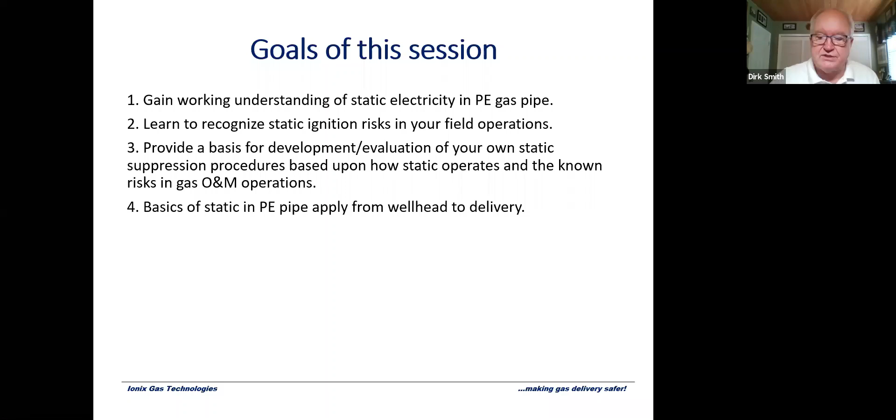I found that we can't assume we all understand the words and verbiage identically. So I want to make sure we understand what static electricity is. Often when I talk to people, they say static electricity is kind of an inferior kind of electricity - that the real serious electricity is what's coming out of the outlet here and powering this computer, and static electricity is inferior. That's not so. Electricity is electricity, energy is energy.

What makes the difference between static electricity and what we call current electricity - the electricity coming out of my wall to my computer - is that static electricity is electricity that has found itself sitting on a material that is not an electrical conductor, and therefore it can't move.

Let me explain. I'm in Boca Raton, Florida, and up the road in Juno Beach, Florida Power and Light has a generator. This generator starts ginning up a whole bunch of electrons by turning a generator. It takes those electrons and dumps them on a piece of copper wire. Because copper wire is an electrical conductor, those electrons, when placed on it, will start to flow along that wire and be delivered into my outlet.

It's the same thing when you take gas from transmission and put it in your pipe and pressurize it - it follows it and delivers it to the customer.

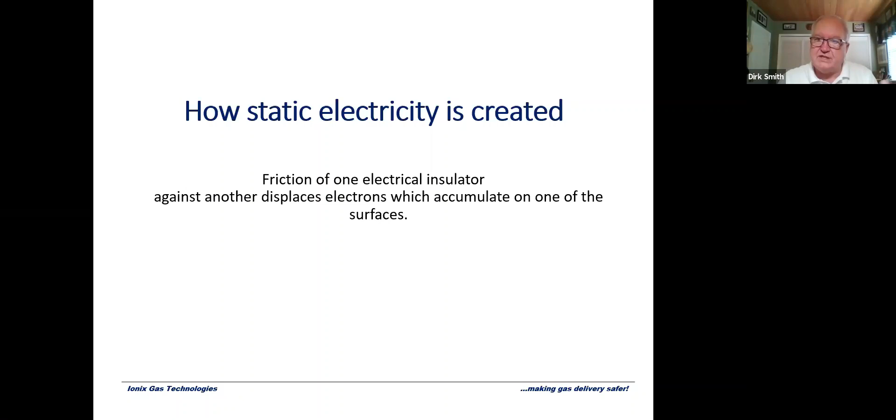These displaced electrons accumulate randomly on surfaces, but for reasons not known to us, they have a tendency to accumulate in certain areas. So it is the mechanical friction - methane being an electrical insulator and polyethylene being an electrical insulator - when those two rub against each other, the compression and force of that gas going past each other shears off electrons, and these electrons accumulate in random places inside your system.

Well, so what? That's great to know, but so what? Here's the problem: Mother Nature is designed not to like electrical imbalances. It's designed to be at electrical neutrality.

So what happens is, if your system has static in it, Mother Nature is going to neutralize itself. The key for you is to control when it does that, so that it doesn't cause an ignition, shock a worker, create a leak, or burn out some electronics.

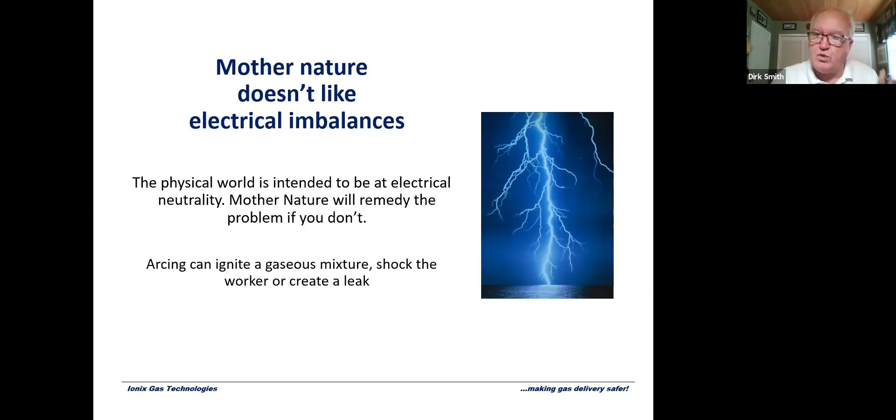So that's why you have to address it. Now that we know what static electricity is, we're going to apply it more closely to your particular situations, and that's the basics of static electricity in polyethylene pipe.

Down here in the States, a lot of distribution companies paid the Gas Research Institute, the precursor to the Gas Technology Institute, a lot of money to do research on static electricity and polyethylene pipe. I'm going to condense all these reports—I think research institutes get paid by the page—so I'm distilling and giving you the summary of a lot of research done on static electricity and polyethylene pipe.

This is the most important slide you're going to see today. If you don't remember anything else about what I say today, don't forget this. This is the root cause of any static ignition you have. At the very end of this, I'm going to talk to you about an incident where people were absolutely flummoxed at what happened because they didn't understand this.

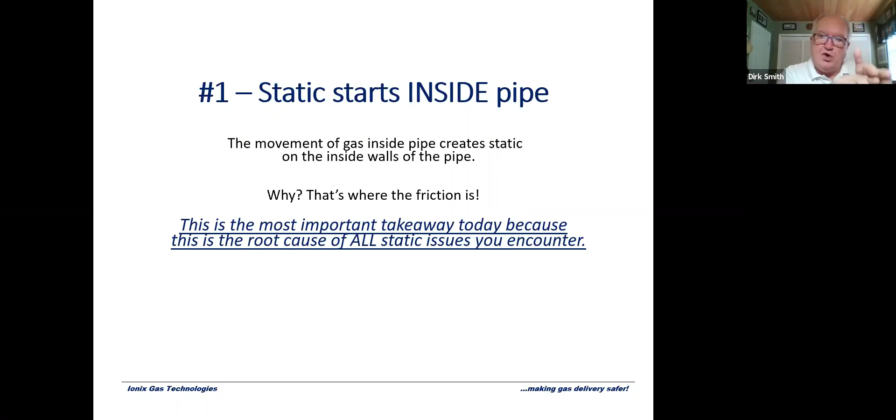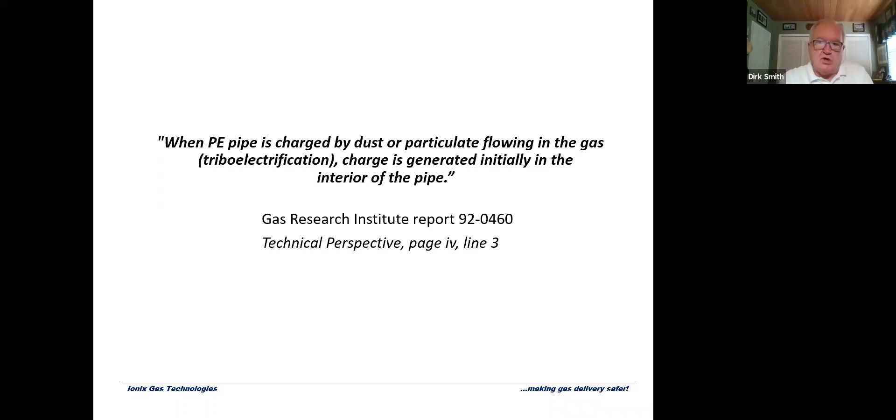All static starts on the inside of the pipe, because that's where the movement is, that's where the friction is. That's initially where the static charge develops. It's the passage of the electrical insulator methane inside a polyethylene insulator pipe that displaces electrons, and that friction displaces the electrons—they start to accumulate on the inside of the pipe. Here's your citation from Gas Research Institute: the pipe is charged by the gas, by particulates, and the gas flowing through the system, and the charge is generated initially on the inside of the pipe.

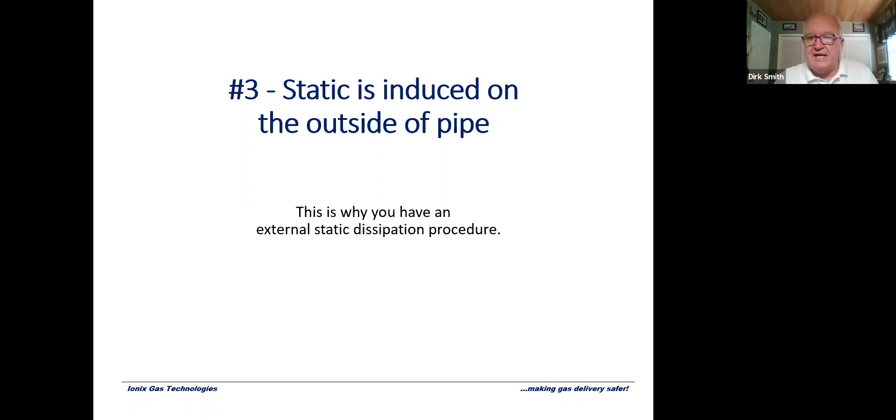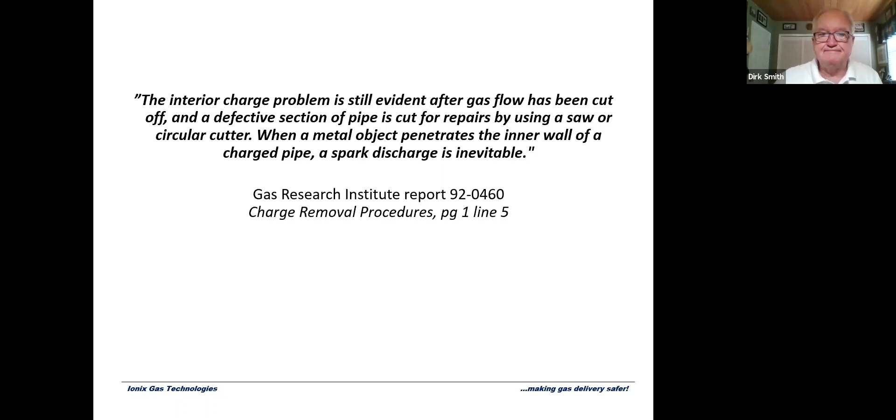Now, from these four basics, it creates four threats for you. We're going to go through all of them, but we're not going to spend equal time on all of them.

The first one, which is the most in-your-face, obvious threat, is the ignition threat, because that is a personal and property threat—that's where you have injuries, that's where you have property damage.

The second thing it causes is shocks, a lot of electrical shocks to workers—we'll talk about that a little bit. The third thing it does is create pinhole leaks in polyethylene pipe, so static is an integrity threat. And finally, as you put more sensitive electronics on pipelines, you're going to find that static is going to burn out some of these electronics.

But the key thing is, if you manage the static electricity in your system, all these problems go away. Those are the four threats. Now, we're going to talk primarily—most of this presentation is going to be about the ignition issue.

Like I said, we're going to talk about shocks and very briefly electrostatic pinholes and very briefly electronics.

But the first threat is ignitions of leaking gas. Now, if you think about it, you have a really unique problem when you distribute gas in polyethylene pipe. It creates its own ignition source. Just by forcing that gas through that polyethylene pipe, you're creating static electricity, which is the ignition source for natural gas.

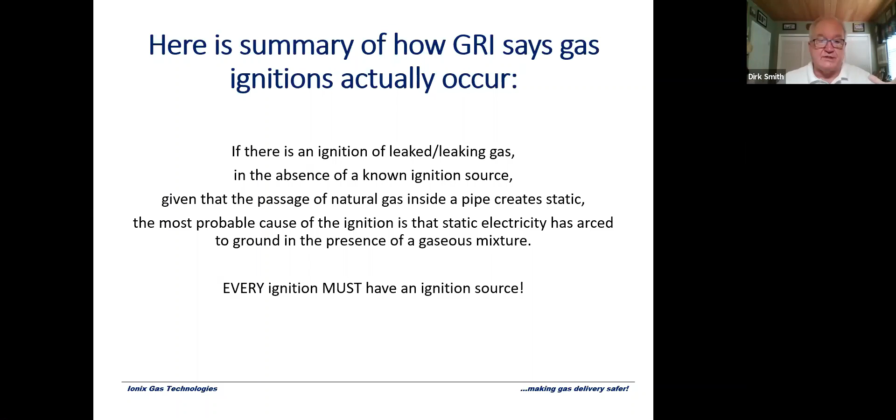Every ignition has to have an ignition source. So given what we know about the passage of gas in polyethylene pipe, if you've got leaking gas and you've got an ignition with no obviously known ignition source, then it must be static electricity. It has to be. So the most probable cause whenever you have an ignition without a known ignition source, like a sparking motor or a car running through a plume, is static electricity.

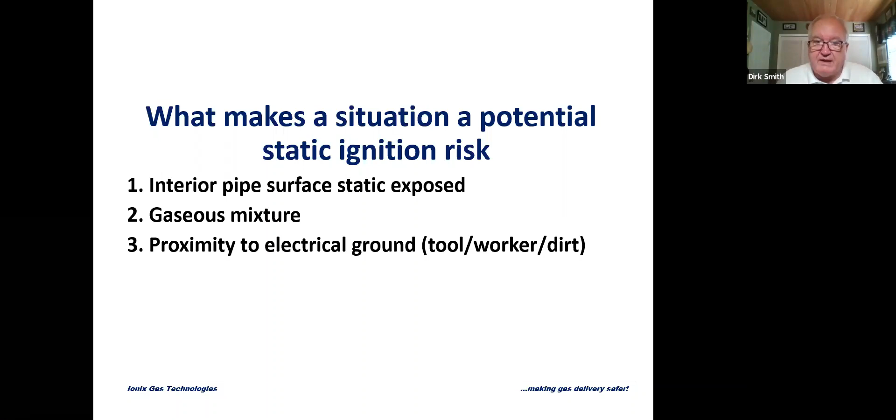So what makes a potential static ignition risk is that you have interior pipe surface exposed, which probably has a static charge on it, a gaseous mixture, and then proximity to electrical ground. That proximity may be a tool, it may be a worker, it just may be the presence of earth and ground.

Now, I'm going to show you this video. This is a very important video, and it's a very poor quality video. The reason why, it was videotaped by a friend of mine over television when it was broadcast over the air, so it was done well before any HD. But the reason this is important is this is the only instance I've ever seen where you have a static ignition captured on film. Let me give you the backstory.

It was in Oklahoma City. Very typical third-party damage. Somebody dug into a medium pressure line. Oklahoma Natural Gas sends a crew out into this housing development that's being built to repair the leak. Now the ONG guys are in the excavation, working to put a clamp on the broken pipe. Before they can put the clamp on, the gas ignites.

Now, the question is not what caused the damage. Obviously it's third-party damage. The question is what's the ignition source? Because you're not going to have these guys smoking cigarettes, they're not going to have sparking motors, so what's the ignition source? The only thing it can be is static electricity. And so this shows you how GRI is right, that static electricity generated inside the pipe due to the flow of gas is the cause for a static ignition.

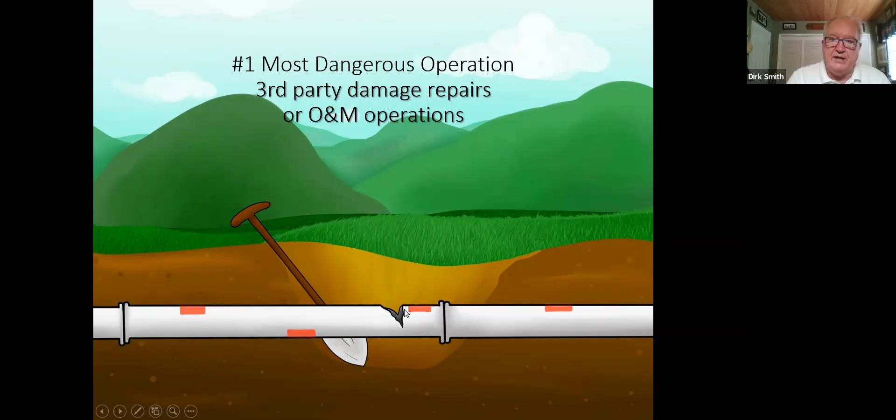Now, if you have an O&M operation, you're probably not cutting into anything that's blowing gas. However, there could very well be a static charge on the inside edge of that pipe when you begin your operation after you've done the squeeze off and taken it out of service. So whenever you're cutting into a pipe, or a pipe's been cut into, you have to be careful and understand there may be an underlying charge inside that pipe, assuming you've dissipated the charge on the outside, and this charge is going to build up inside and under those broken or cut edges.

So whenever you have a purging operation, you have to be aware that there's a lot of static on the inside edges where that pipe is exiting gas. And in the same way, assuming you use a metal grounded purge pipe, the connection between your plastic and your metal is never going to be perfect. There's always going to be some turbulence in the gas passing through it there. So once you separate your pipe, you need to be aware that there's static on the inside edges of that plastic pipe.

Now, with all the interest in overpressure vents and relief valves due to overpressure incidents, any kind of valve or device that's going to engage during a relief or overpressure operation, the same thing occurs: if it's vented outside, the static on the inside of that pipe can build up and arc and create an ignition.

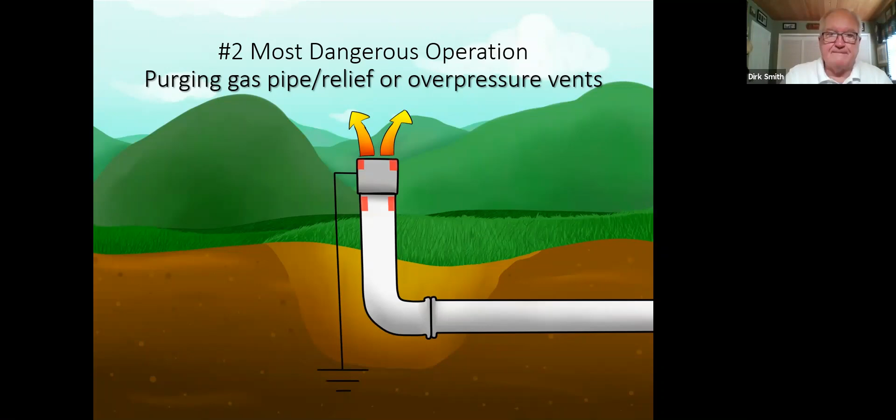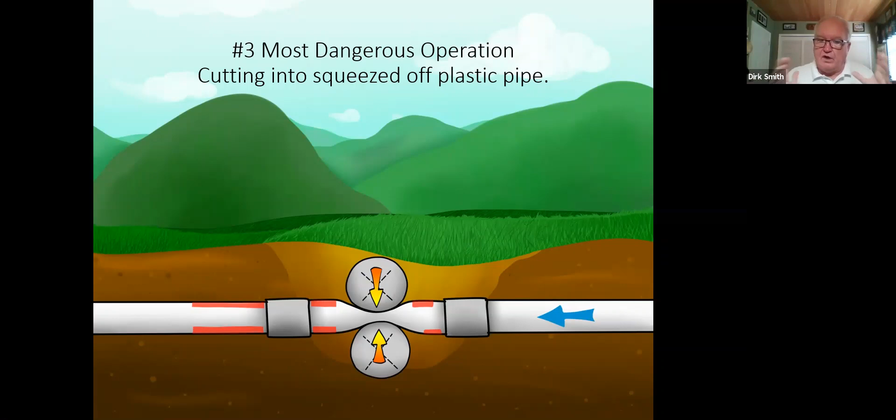The third most dangerous operation is cutting into squeezed-off plastic pipe. When you squeeze off a plastic pipe, the Venturi effect takes place and the gas speeds up trying to get through the narrow opening. As it does, it creates tremendous downstream interior voltage, and also substantial interior voltage upstream from the squeeze-off, though primarily most of it is downstream. So when you've squeezed off a piece of pipe and stopped gas flow, you have to exercise extreme caution when cutting into it because of the substantial voltages that could be downstream and upstream of the squeeze-off.

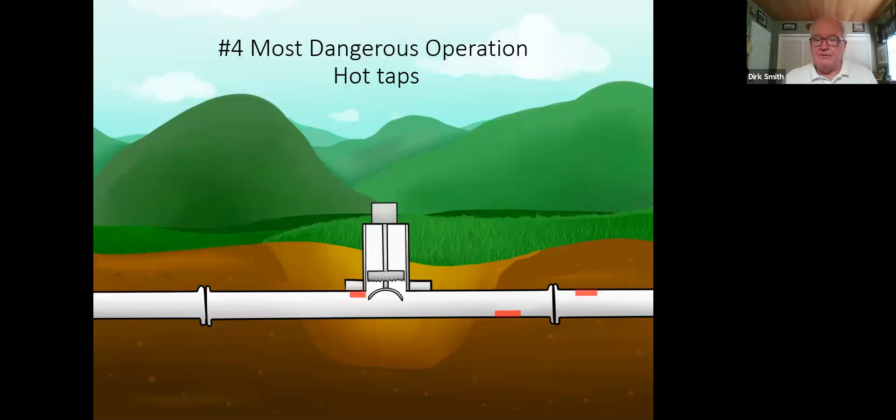The fourth most dangerous thing is a hot tap. Here you have a fixture that's been fused on, and as the tap came down, it cut into a hot spot in that pipe. Whenever you have a tap, you've got to be concerned about the static on the inside of that, and you want to dissipate the static at the point where the tool is cutting into the pipe. Whenever you're cutting into a pipe, you might cut into a hot spot, and even though it's under pressure with residual gas, the tool can ground it or arc to ground, and then you can have an ignition. That's happened whether it's been opened up, reached into, or cut into.

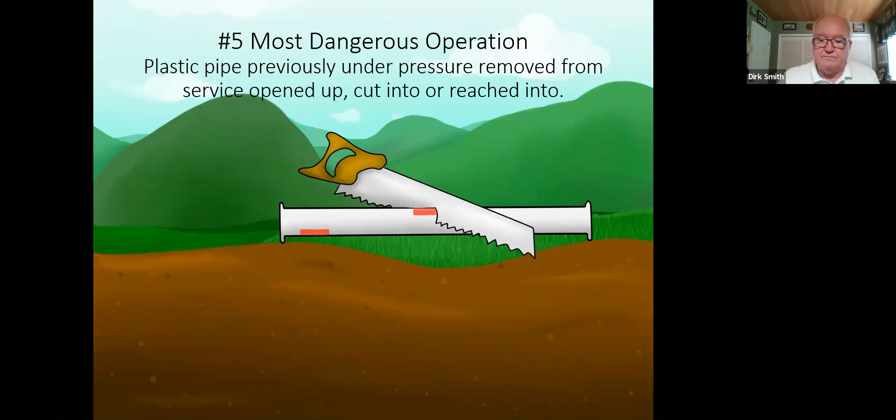Now I'm going to take a little sidestep here. Most people think static is only a polyethylene plastic pipe problem. Not so—it's also a metal pipe problem. Metal pipe, by nature, since it's an electrical conductor, does not have the same potential to have as many static ignition issues, but that doesn't mean it can't have them.

Bare pipe is going away—you're replacing it all, it's all coated. Or you have old metal pipe; some guys in the Northeast US have old cast iron stuff, and oh my gosh, they don't want to know what's inside those pipes. What happens is if you have coatings or residual chemicals, tars, grease, or scale, those patches in a metal pipe are electrically isolated, and static can build up on that. If you happen to expose that to ground, it can ignite a gaseous mixture. So you have to be aware that just because it's metal, that does not mean static can't be present inside that pipe.

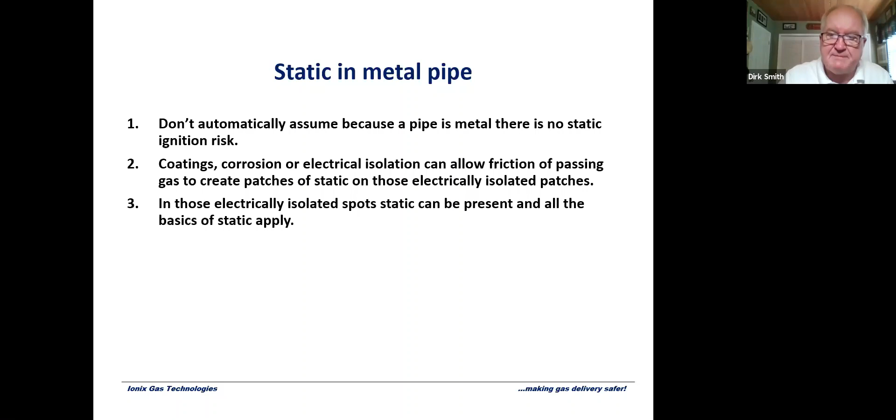What's the ignition source? Everything has to have an ignition source. There's nobody out there—it was in the middle of the night. What's the ignition source? The pipe failed, gas is escaping, and at a place on that pipe, probably where there's coating, the static charges start to build up and up as that gas is exiting at high velocity. The charge finally gets so high it arcs to ground and ignites a gaseous mixture.

So be cautious—just because it's metal pipe does not mean there's no static present. Now, we've talked about the first threat, about where the static is in a lot of these operations, so you can be aware of them. Now we're going to talk about electrostatic shocks to workers.

This is much more common. When I talk about ignitions, there have been fatalities due to burns—that happens, though it's not common. An electrostatic shock to workers—there are a lot of cases of these.

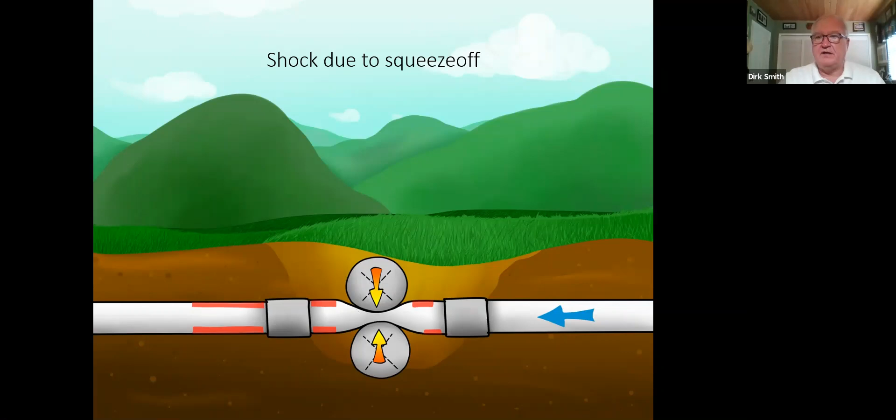Once again, we're going to go back to squeeze off, because this is where you're going to find some of the highest voltages generated inside a pipe, due to squeeze off operations. We'll talk about grounding tools in just a second, but forgetting the tool right now, these static charges that build up inside this pipe, both in the front and in the back, if somebody gets close enough to it, it will arc from that pipe like it did that guy and go to ground through the worker. So you have to be very careful dealing with squeeze off and the shocks it can create for workers. The second thing is when you cut into hot spots in pipe.

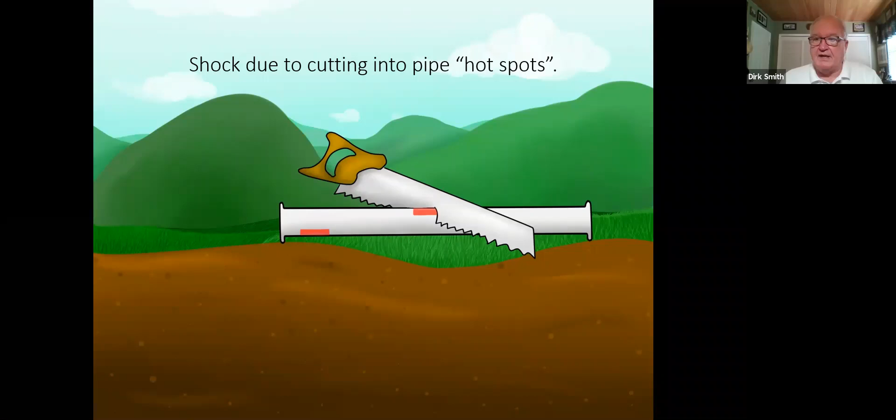I had an incident in the Midwest or Western United States. A distributor had an 8-inch line with a 6-inch stub line off it. The area was growing, so they wanted to extend the 6-inch stub line. They took the 8-inch line out of service. Then the guys got into the excavation to cut through the stub to extend the line. Next thing, boom, explosion. Not a fire, just a shock. Two guys went off to the emergency room. The gas distributor was embarrassed because he hadn't called for a locate, so he calls the electric company and says, sorry, we didn't call for a locate, we just cut one of your lines. The electric company says, we don't have any lines out there. What had happened is they'd cut into a hot spot and the tool grounded it and shocked the workers.

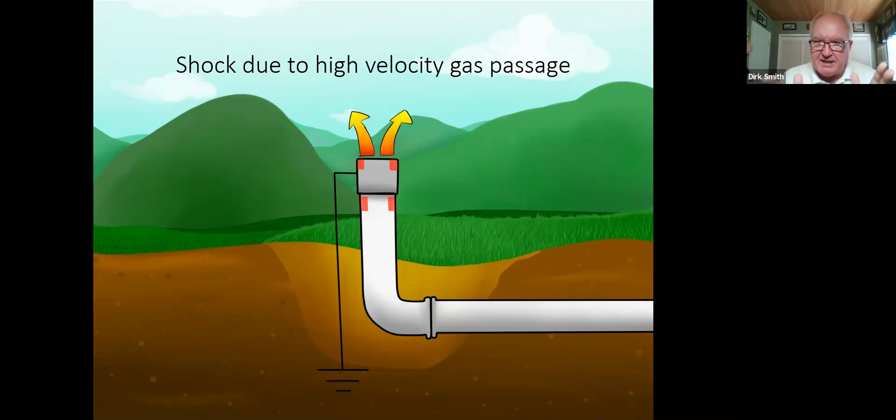The same shock can happen again when you have high velocity gas passage, whether it's a purge line like that, or any kind of blowing line. You need to be sure to understand that that could be a shock hazard from the charges developed inside that pipe.

Now what we're going to do is talk about developing and evaluating best practices and operating procedures for static ignitions and static shocks. In a few minutes we're going to talk about electrostatic pinholing and electronics burnout. There are no procedures to prevent that, and I'll explain why. So basically, what I'm going to do now is start to talk about how you can look at these operations we've just covered and have procedures that address preventing ignitions and preventing shocks.

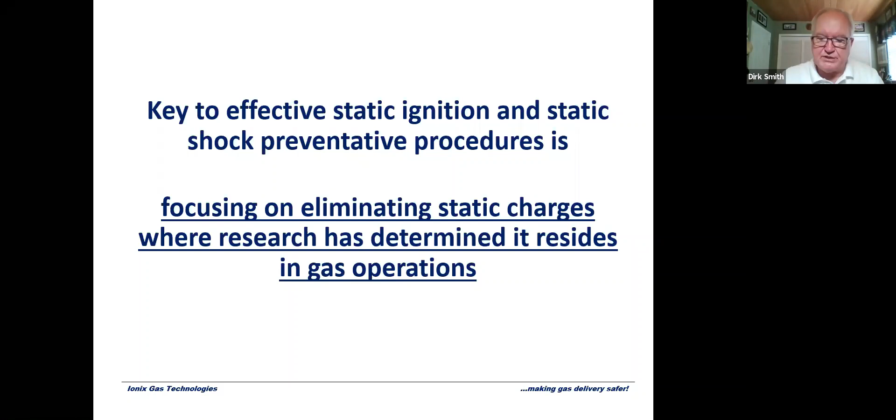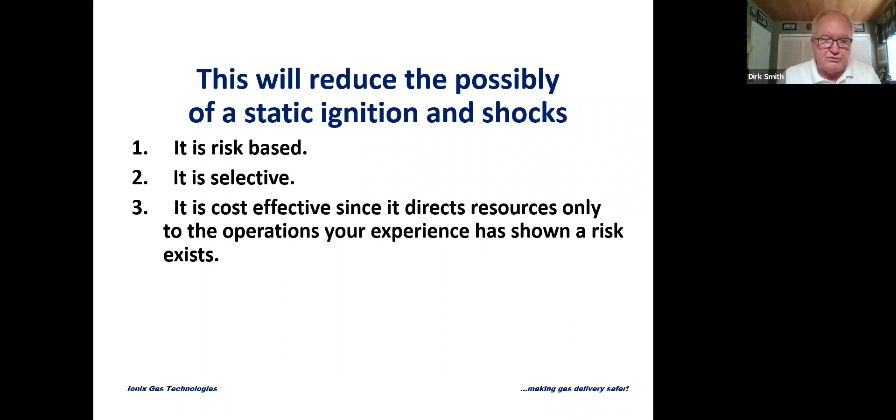The key thing is, now that you have an understanding of what static is, the basics of static in polyethylene pipe, and where they occur in these operations, once you focus your procedures to eliminate the charge where research has determined it exists in these operations, you're going to be able to prevent shocks and ignitions, and that's our goal. When you do that, you've identified where the risk is, you're selective in your efforts, and it's cost effective because you're not just doing a shotgun approach, spraying everything or grounding everything. You're saying, I know where the static is in these operations, and I'm going to make sure my procedures take care of the ignition and shock risk in these operations.

Now when we talk about an ignition threat, we're going to start to talk about how to evaluate your static risk reduction SOPs. The first thing you have to do is get management buy-in. Right now there are 58 people on this webinar, and you clearly understand this problem. But just because you're here doesn't mean your management has the same interest in preventing static ignitions and shocks as you do. You must get management buy-in.

Alagasco, which is now Spire here in the States, their safety manager Tom Rayburn, who's since retired about 3 years ago, went through all the claims at Alagasco. He said, Dirk, when I went through all the claims, I found that static ignitions were one of the rare ones, but they were one of the most expensive. And when you think about it, burns are terrible. They are really, really terrible.

We had an incident out in West Texas, a standard O&M operation. They had an ignition, and this young kid—how he didn't die, I don't know—wound up in a burn intensive care unit for 2 months, with 2 nurses around the clock for 2 months. And that doesn't include the step down and rehabilitation, everything like that.

Burns are terrible. So there has to be management buy-in that prevention is cheaper than remediation. That's got to be the first thing on the list to do.

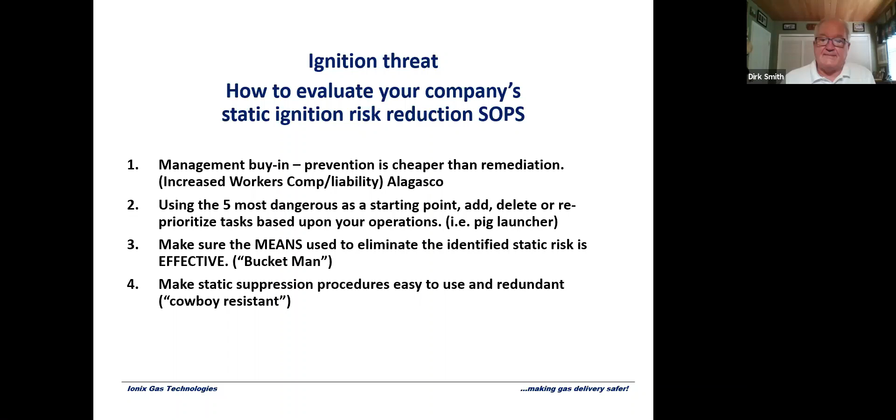I'm going to give you two simple things you can do as soon as you leave this webinar that will make a difference. The first is to dissipate static from a safe distance whenever possible - use remote static dissipation procedures. The purpose of these procedures is so ignition doesn't occur with a worker in proximity. A lot of times using rags requires putting the worker close to a possible ignition to apply the static suppression procedure. That makes no sense. So try to dissipate static from a safe distance.

The second thing is be ruthless in your enforcement of the procedures you develop. Be consistent and comprehensive.

About four years ago in the Mid-South, a crew of five from a municipality went out to do a standard O&M operation in a street excavation. I know the operator, I'm not privy to the details, but there are certain things you can take from it just from the basic facts. Witnesses said they heard a whoosh and then screams as a two-inch gas line was blowing and on fire in an excavation. There were three guys in the excavation and two outside. All five went to the hospital. Of the three in the excavation, all were critically burned - two survived, one died thirty days later from his burns. My purpose is not to point fingers or assign responsibility. We don't know if the worker didn't follow procedure or if the company didn't have one. But clearly, when you have a blowing two-inch gas line in an excavation with three guys and no fire suit, it is a major failure of procedure. If you are not ruthless in enforcing your procedures, you can have a catastrophic event.

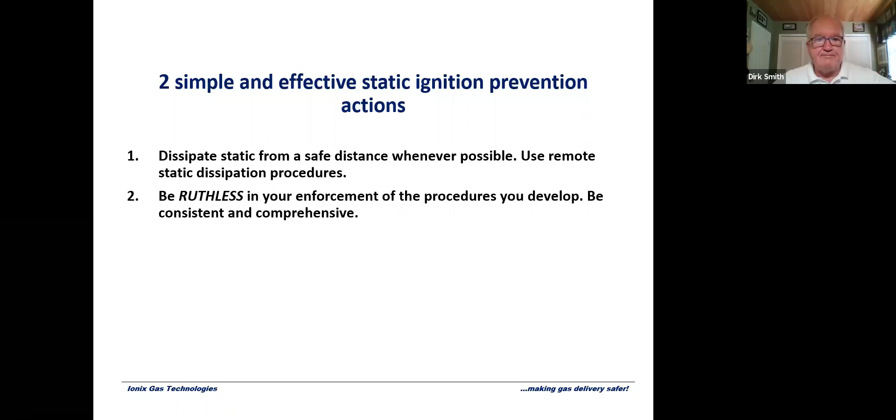The best way to prevent that is to be ruthless in the enforcement of the procedures you develop or already have, and be consistent and comprehensive. I know one operator that if they catch a guy not following a static suppression procedure, he's fired. That's it, no explanation, no recourse, no warning. That's it, because it can be that serious. So be ruthless when you set up your procedures.

Now, we've been talking about static ignition, and the static shock threat is very similar to this. The first obvious thing you can do is keep safe distances from known high voltages until you've at least externally dissipated the pipe they could come in contact with, keeping in mind there could be a substantial interior charge.

Now, a lot of times there's grounding procedures, people have grounding of tools. It's important to understand what grounding of tools does and doesn't do. Grounding of tools is only a worker protection procedure. It does not do anything to get rid of the static. You say, well, yeah it does, if static charge goes through the tool the guy doesn't get hurt. Okay, well, that's true.

But remember, that tool—because polyethylene is not an electrical conductor, it's an electrical insulator—only grounds a charge at the point it touches. So imagine you've got a squeeze-off tool and it's squeezed off a section of polyethylene pipe and you've got that grounded. All that does is take the charge where that metal came in contact with that plastic and conduct it to ground, preventing that charge from going through the worker to ground instead.

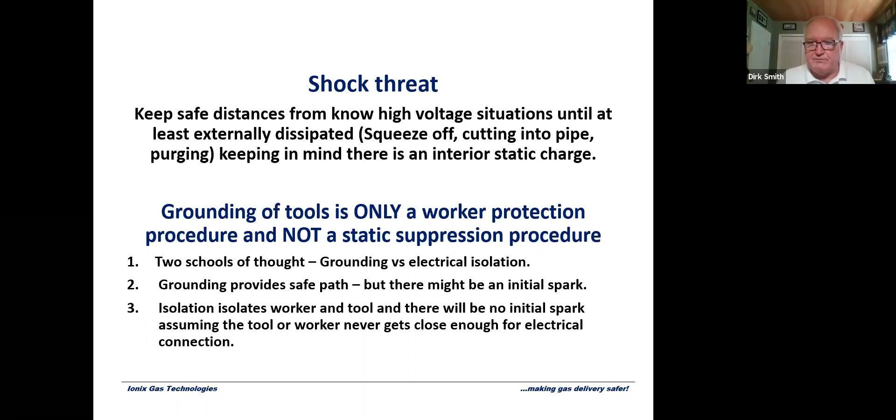There are two schools on that. I'm not here to advocate either one. All I want you to understand is grounding of tools is not a static suppression procedure. It's a worker protection procedure, and that's important to remember.

Now, we've talked about the two primary threats that I think most of you are interested in. I'm going to talk about two more very briefly, just so you recognize them, because static creates leaks in polyethylene pipe. I want to explain this because I've seen operators fight this problem for years, thinking they've got bad pipe, when the problem is actually static. I just want you to be able to recognize it for what it is.

This is a paper that was presented to the Plastic Pipe Symposium about 1985, written by Mark Staker. It was the first paper ever written about static electricity in polyethylene pipe, and it was not about ignition. It was about the fact that when he was doing squeeze-off, he noticed he started getting pinhole leaks around his squeeze-off, and he wrote a paper about it.

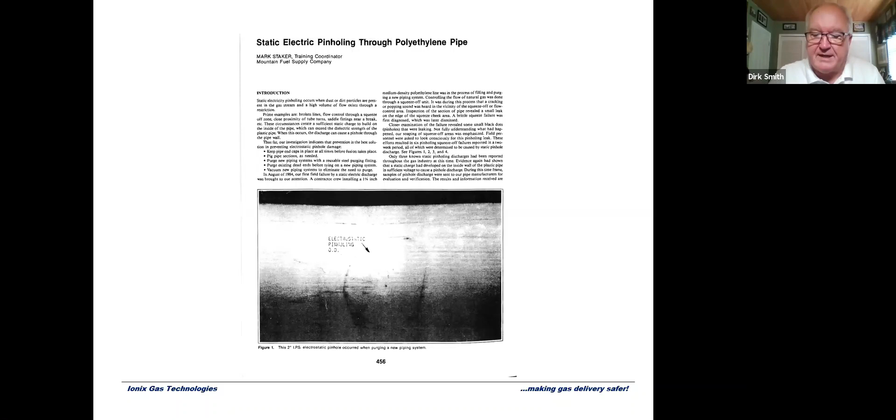Essentially, what happens is this: if you go back to the basics I've talked to you about, static originates on the inside of the pipe.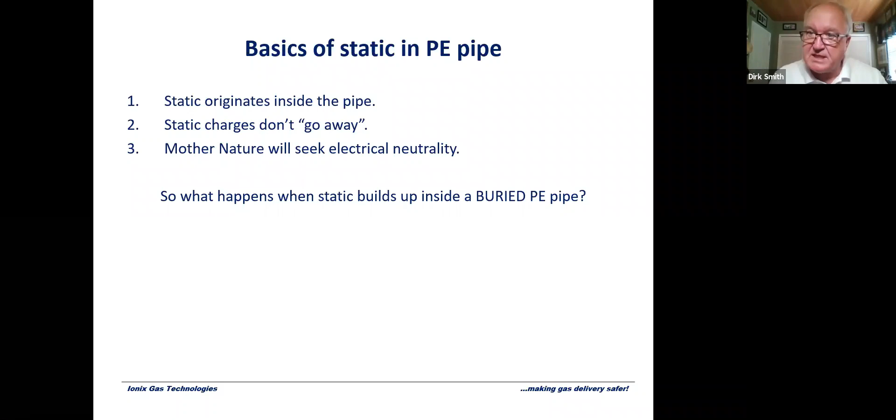It can't go away. Mother Nature wants to go to electrical ground. We've been talking about instances where that pipe's exposed, where you've dug it up to do an O&M operation to repair third-party damage or something like that. What happens, however, if that pipe is buried, not exposed, and those charges build up inside that pipe? This is what happens.

This is a cross-sectional of an electrostatic pinhole in a standard yellow pipe. What happens is the static builds up on the inside of the pipe due to the friction of passing a gas. Remember, Mother Nature wants to go to electrical neutrality. So that charge then, even though polyethylene is an electrical insulator, it's not an infinite electrical insulator.

Just like your polyethylene pipe will hold pressure, it won't hold an infinite amount of pressure. There's a limit. Electrically, it's the same way. There's a limit to how much voltage that pipe can stand before it fails. And what happens is that charge builds up on the inside, it arcs through the pipe to ground itself, and in the process, the heat of the arcing burns a hole in the pipe and creates a pinhole leak.

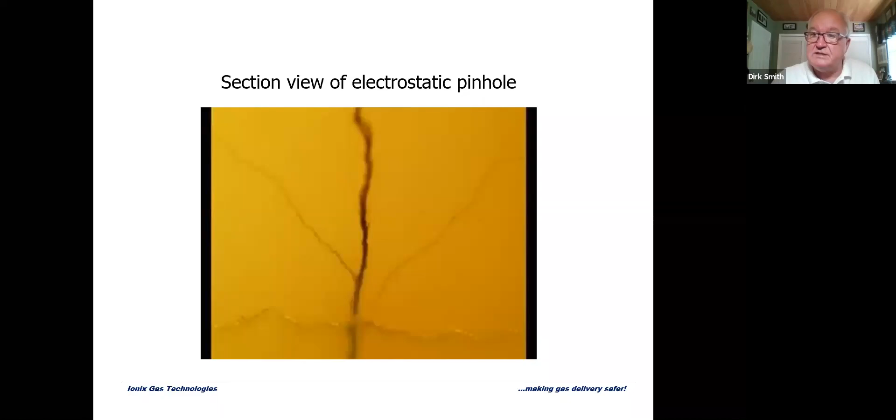Gas research has confirmed this. The charge conditions get so high across a pipe wall that they exceed the strength of the material, and they arc through it and create a pinhole leak.

Now, in the United States, and I know up in Canada it was, I think maybe you probably passed it sooner, but in the US they put a no-regrind rule in, that they can't put regrind in polyethylene pipe. And the reason is, in the United States, the PHMSA specifically cited in the Federal Register when they made this rule that we believe regrind is contributing to pinholes.

They don't, down here in the States, PHMSA does not want pinholes in polyethylene pipe. But it's important to remember that all pipe, doesn't matter whether it has regrind or no regrind, all pipe will fail if the voltage gets high enough.

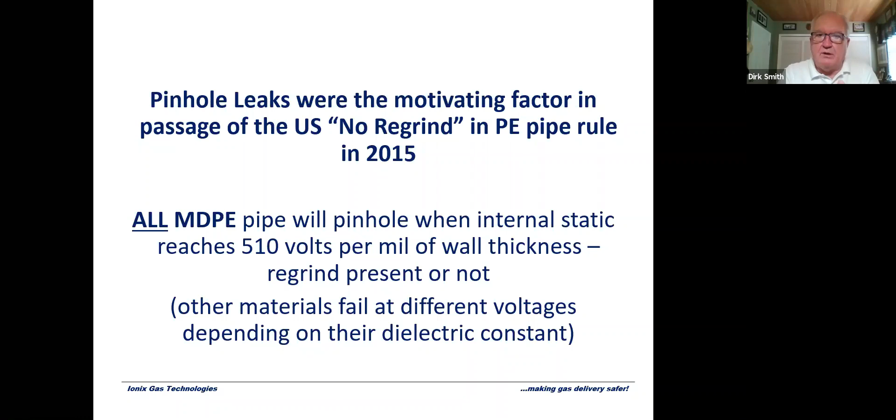If you take virgin MDPE pipe, there's an engineering constant. What will happen is that pipe will fail if this voltage inside exceeds 510 volts, approximately, per 1,000th inch of wall thickness. Other materials will fail at different rates. But remember that the problem is static, it's not the material.

So all I want you to do is to remember that pinholes are created in the normal operation of gas transport. It is not a materials failure.

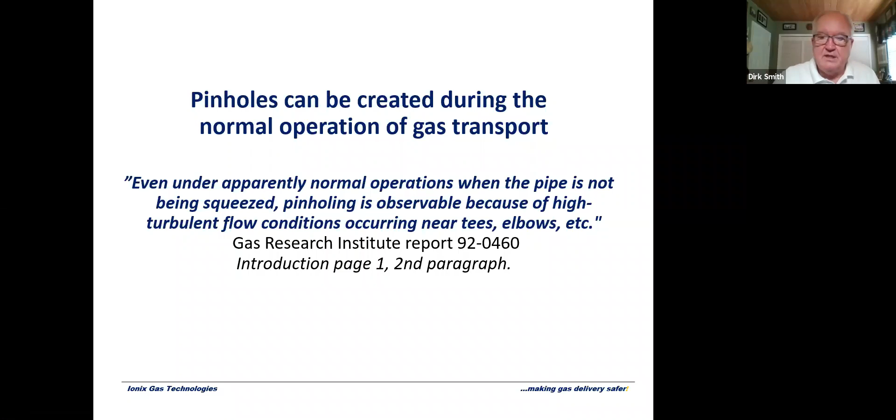I have a webinar that deals strictly with this problem because this is a problem both at gas producers in the Permian Basin to delivery point. But all I want you to do is recognize that it's not due to manufacturing defects, it's static.

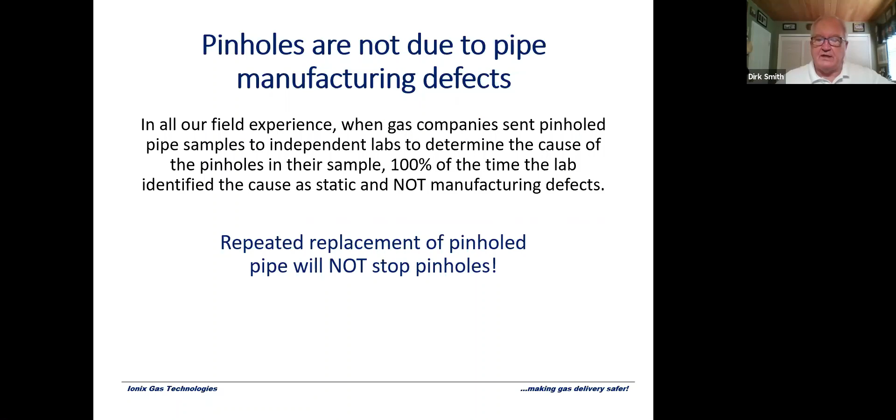All the lab tests and failure analysis have said it is not a materials failure, and replacing a pipe is not going to solve the problem. You got to get rid of the static.

Here is the last thing on this issue of electrostatic pinholes. Down in the States, there's a newsletter circulated with fire investigators, forensic fire investigators, called the Fire Findings Newsletter. They sent this to me because they were getting fires at gas meters and they could not figure out what the source of the leak in the gas was.

They said, could it be pinhole leaks in service lines that accumulate and ignite? Sure can. I had a gas well catch on fire in the Permian Basin because the gas line coming off the phase separator pinholed and ignited the gas and burned away the pipe. Yes, it can. So you need to deal with the problem, and it's not replacing the pipe. That will not solve the problem.

Very quickly, if you have pinhole leaks, they usually occur in 1 inch or smaller plastic service lines because the smaller the pipe, the thinner the wall, therefore the less voltage needed to put a hole in it. I've seen pipe with 1, 2, 3, 4, 5 holes in it. I've only seen it in polyethylene pipe, no PVC. I've seen it in medium density. I've seen it in high density polyethylene. I've seen it in every brand of pipe.

And if you have pinholes in your system somewhere, they have a tendency to congregate geographically. In other words, if you're finding some service lines in a neighborhood that's got pinholes in it, you probably have them in the whole neighborhood. There's a problem in southern Indiana, northwest Kentucky, southern Illinois, Fredericksburg Virginia, New Haven Connecticut. For some reason, we don't know why, they have a tendency to congregate in geographical areas, and they're going to continue to be made unless you address the static problem.

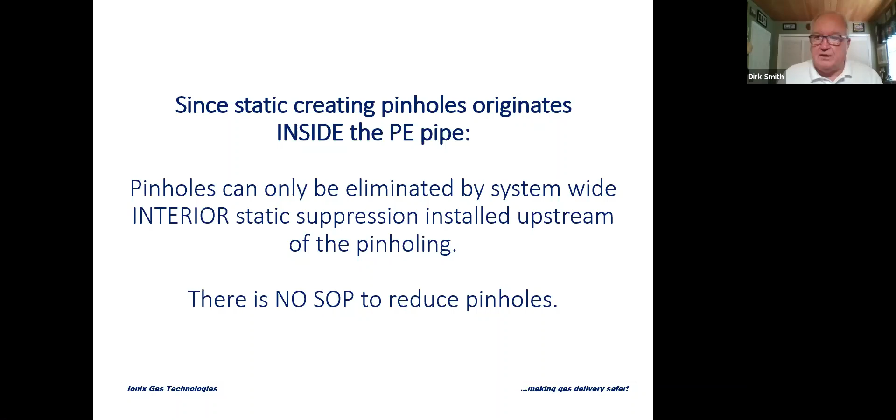If you just keep replacing the pinhole pipe, it may be cheaper to put static suppression in so you don't have to constantly be digging up stuff. Very last thing, there's only one slide on this, then we're going to review standard mitigation technologies and do a big summary, and we're done.

We're going to find more and more that static in polyethylene pipe is going to burn out electronics. Remember we talked about how static builds up in that pipe. Let's say that pipe is coming up out of the ground. It has an electrical isolation joint, and you've got a solid state meter up there. Now you can have 40, 50,000 volts inside that service line.

If that voltage arcs across that isolation fitting, it can go through that meter and burn it out. All solid state electronics is designed for 2, 3, 4, 5 volts, and these service lines at the pinhole are at voltages of 45, 50, 60,000 volts. So when you start to see areas where electronics are burning out, everybody assumes it's lightning. It may be lightning, but it may be lightning inside the pipe. Again, there's no standard operating procedure that's going to prevent this because it's an interior pipe problem.

I was out in Kansas, and what had happened is they were doing a repair operation. They put on the locate transmitter, connected the tracer wire, traced the pipe, dug it up, and squeezed off the pipe. Next thing you know, 3,000 feet downstream, the locating transmitter burns up.

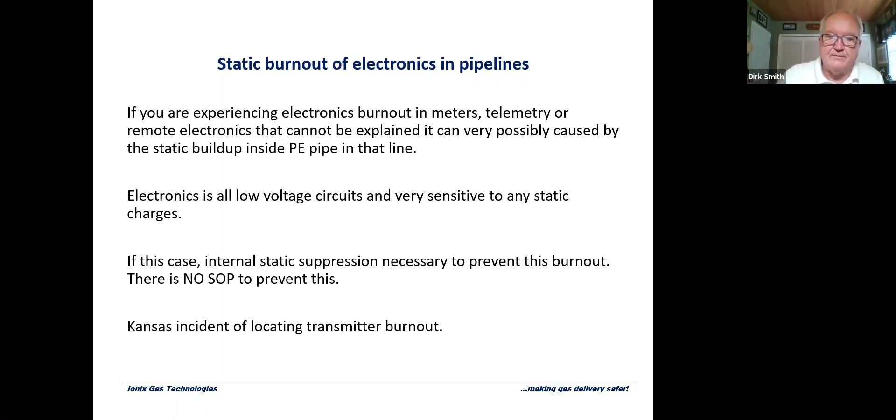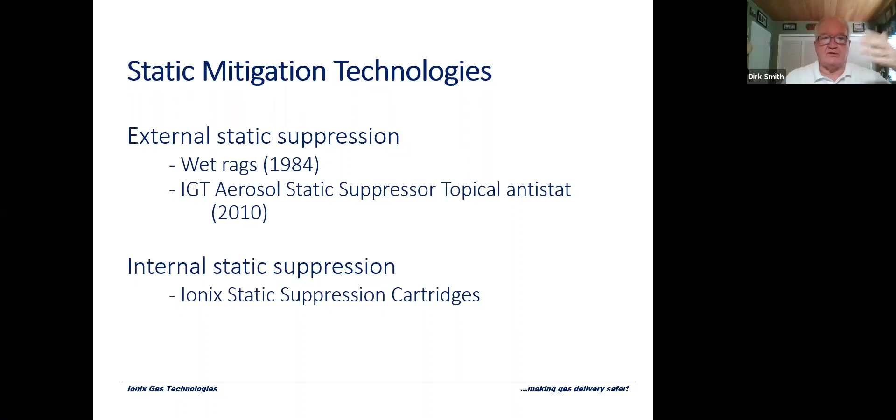Real quickly, we're going to finish up here. Static mitigation technologies — what I'm doing is basically separating them based on what surface they address: static on the exterior of the pipe and static on the interior of the pipe. So we're going to look quickly at the technologies available to get rid of static on the outside of the pipe, and then quickly on the inside.

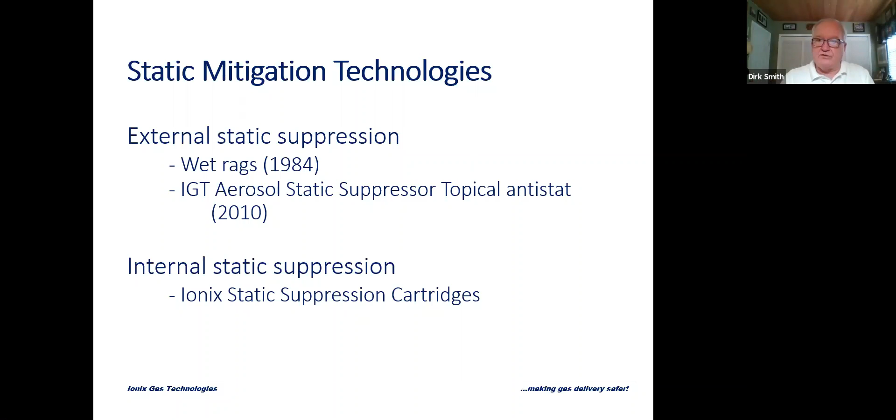On external static suppression, you have wet rags. They were recommended by the AGA back in the 1980s when polyethylene plastic pipes started to be introduced, because they had nothing else. What we did is we took antistat technology developed for semiconductors and computers, modified it for the particular needs of the natural gas industry, and made our aerosol static suppressor. It's a topical antistat. Then for interior use, we have Ionix static suppression cartridges. Now I want to talk to you about the advantages and disadvantages of these technologies.

First of all, using grounding and wet rags — that's essentially all that happens. Wet rags simply ground whatever surface they're connected to. This is a picture of Normac's ASG system. They've since discontinued it and recommend our product as a replacement, but I wanted to show it because it's a cleaned-up version of wet rags or soapy burlap. Essentially, you see that pink film — they wrap it around a surface, spray it with their solution, and ground it with that rod, which carries the charge off to the ground. That's basically what wet rags do: you wet them up, they become electrical conductors, and you make sure the rag is connected to ground.

Now, it's a cheap technology, it's an old technology, but there's a couple problems with it. First of all, it really doesn't solve the problem of why you're doing static suppression. You want to get rid of a static charge so it doesn't ignite in the proximity of a worker. Yet to use wet rags, you've got to go down where there's a potential ignition and wrap those rags around that surface and ground it to get rid of the charge. Well, you really want to get rid of the charge before the guy goes into the excavation, not make him go into the excavation to get rid of the charge.

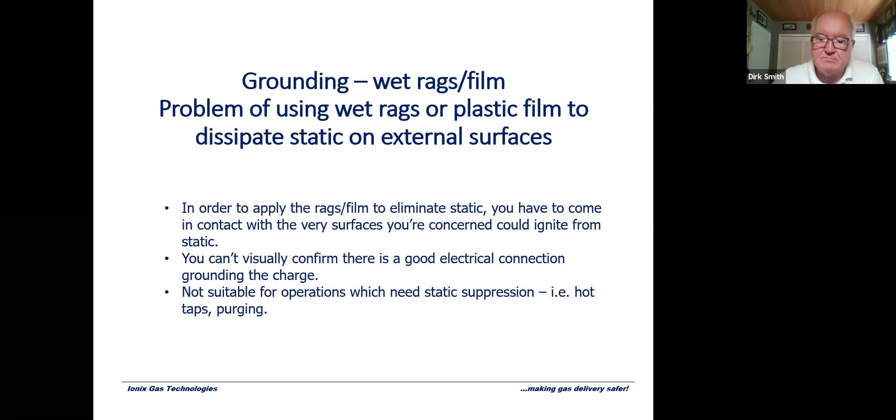Our external topical antistat, the IGT aerosol static suppressor, works on an entirely different theory, entirely different. We don't ground it. What happens is on a chemical, molecular basis, when our liquid hits a surface, it immediately dissipates the static charge. It does it on contact without grounding, immediately. So the nice thing about it is you can get rid of a charge anywhere you can get a surface wet with our aerosol.

Like with hot taps, you simply spray inside the tap. If you've got a purge pipe, when you're finished purging, you just take the reach tool and stand up there and spray inside the pipe. Or if you've got third-party damage, you've done your squeeze off, you don't want anybody in that excavation. You take the reach tool and spray from the outside and get it all nice and wet. You're done.

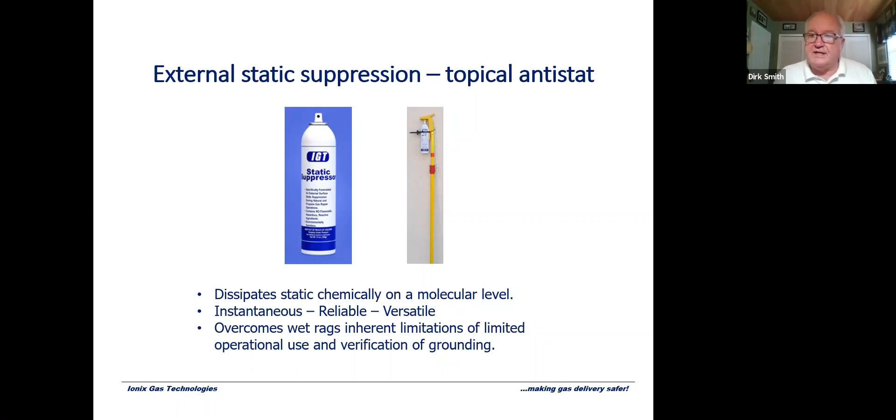We had our aerosol tested by the Gas Technology Institute for this reason. Guys, people are creatures of habit. Your workers out there say, yeah, I've used soapy rags for a long time. How do I know this really works? And we wanted to make sure it was as effective, that there's no legacy issues.

If you spray on polyethylene, is it going to cause a legacy issue or anything like that? GTI tested it, and they said it doesn't affect the PE. It's as effective as wet burlap in eliminating static, and it's non-flammable. So that's why we had them test that.

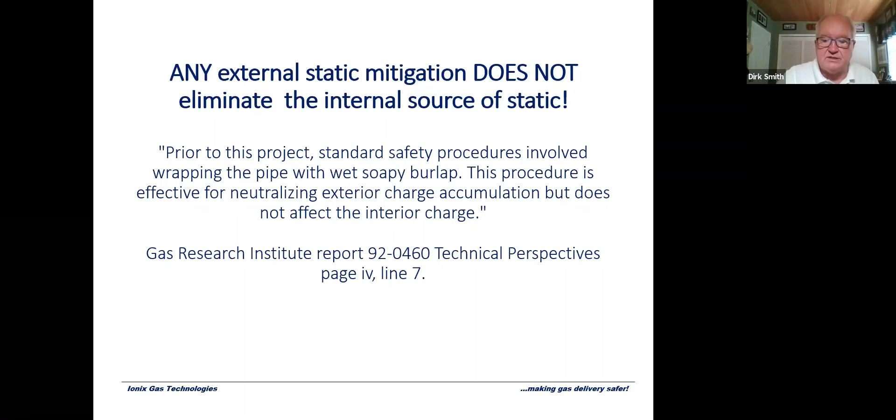Now, it's important to remember when you put all your procedures together, external static mitigation does nothing to get rid of the internal static charge. Here's the citation from Gas Research Institute. It's vitally important you remember that. Static is generated initially on the inside of the pipe. It creates a charge on the outside of the pipe. If you get rid of the charge on the outside of the pipe, you've done nothing to get rid of the charge on the inside of the pipe. You must respect that charge.

Now, we have an internal static suppression cartridge system, and it's not a liquid. It works entirely differently than our spray, but it's designed to eliminate the creation of static inside the pipe, which it does. Most of our customers using this are doing it because they want to get rid of pinholes. They're having pinhole problems, and when they get rid of the internal static, the pinholes go away, and it saves them a lot of repair costs. So that is designed to eliminate static inside the pipe.

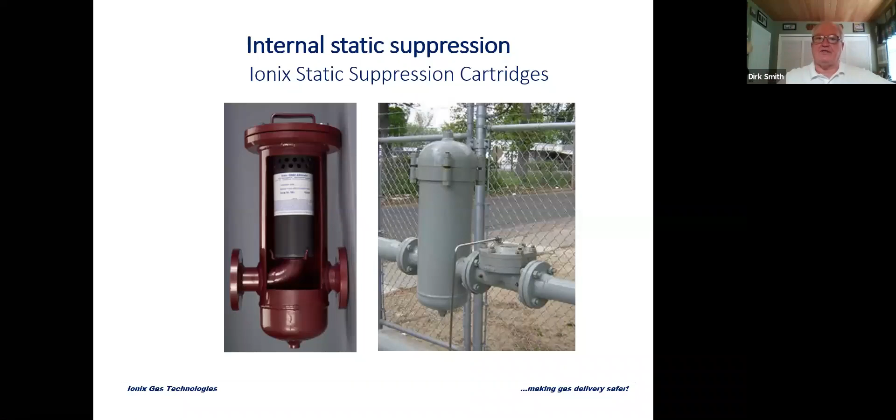So that kind of gives you an outline of the technologies for external static suppression, both grounding and topical antistat, and then internal static suppression with our cartridge. We also had it tested by NICOR and labs, and we were able to make static come and go in systems in a neighborhood, just by bypassing it in and out. We can make static come and go at will with our static suppression system installed in the system.

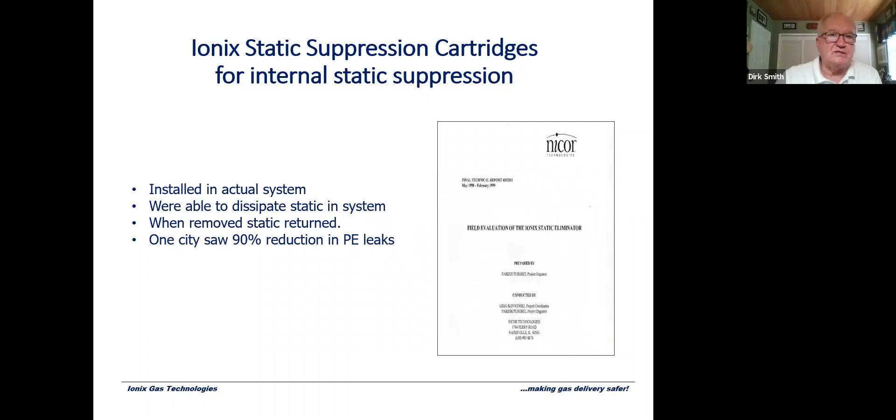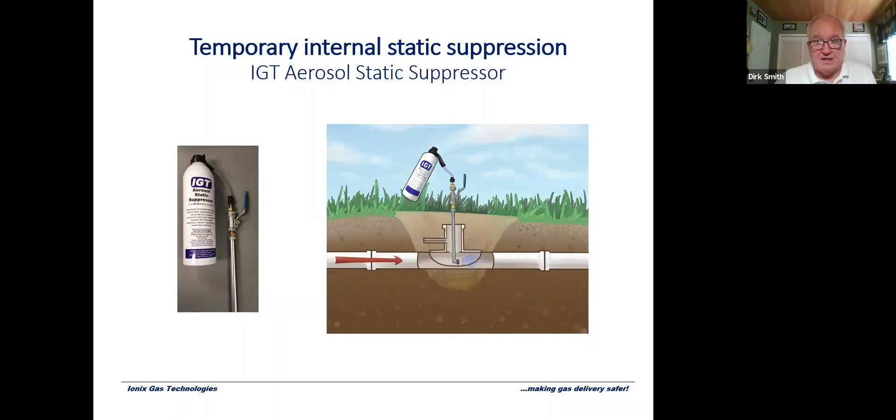And then finally, we have a tool that if you want to get rid of temporary and internal static suppression, we have a tool using a fixture from Fisher Plastics that allows you to spray our aerosol inside a line and coat the inside of the line with our aerosol static suppressor on a temporary basis.

So we are done. I'm just going to go over it quickly. We're going to do a quick review.

Static is normal in gas distribution systems. I have guys sometimes say, well, what are we doing wrong? We got static on our system. Static is normal. Static ignites gas, it causes shocks, it creates leaks, and it burns out electronics. Static is an injury and an integrity issue.

The root cause is always the initial static inside the pipe due to the passage of gas. External static suppression will only prevent ignitions caused by external static, and it does nothing to get rid of the charge on the internal side.

Pinholes are caused by internal static. That's an internal static issue, it is not a materials failure. Electronics burnout, again, is caused by internal static, and you're going to find it's probably not by lightning.

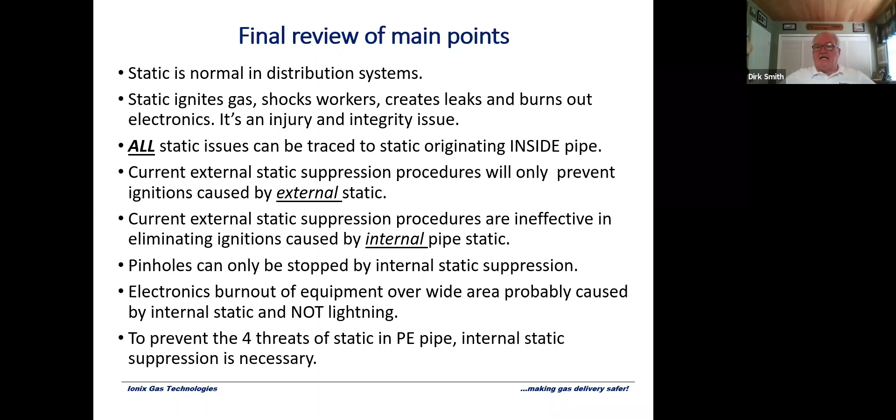And if you want to get rid of the four threats of static in PE pipe, internal static suppression is necessary. So with that, you people have been very kind to give me an hour of your time. Your time is valuable, and I've given you a lot of material.

Like I said, they're going to record this. There's more than you can take in at once, but I hope it has been beneficial, worth your time in viewing. So with this, I'm going to turn it over to Mike.